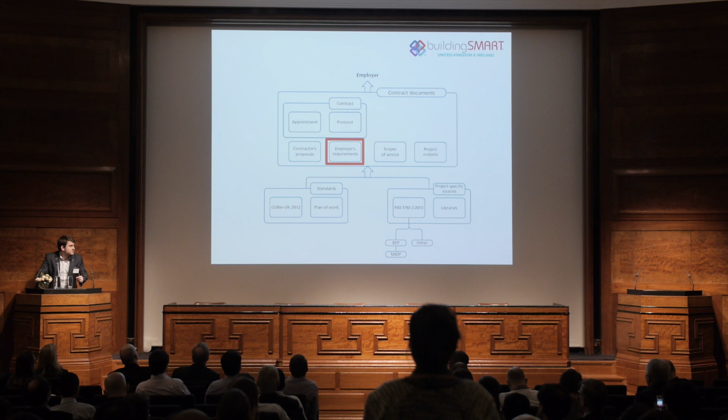For context, before we start, I just wanted to briefly tell you what an EIR is. The EIR, or Employers' Information Requirements, is one of the key contract documents that we specify here in the UK. You can see it there, surrounded by a nice big red box. It's one of the key things we set out quite early in a project. In fact, when we look at the information delivery lifecycle, it appears right in the very top corner, and it's one of the first key things that gets set out when working on a BIM project.

So it's very important. It's actually used to help specify the project information model. It's one of the key documents at the start of the scheme that informs what's happening throughout the whole project. Because of this, it's a very important thing to make sure we get right.

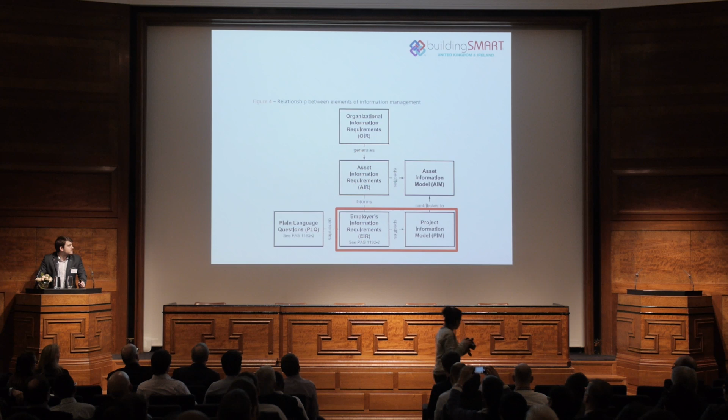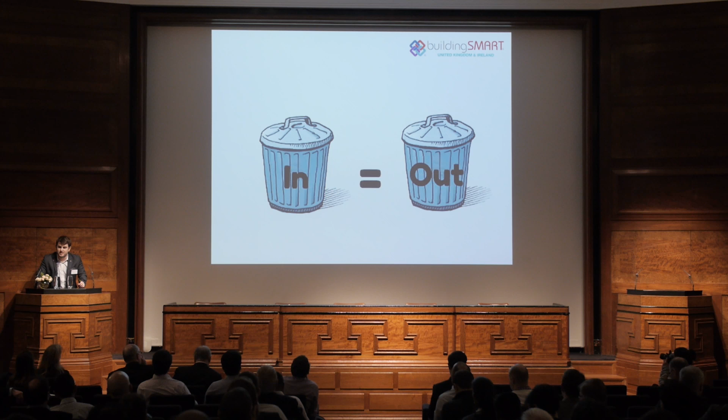Now, as we all know, if garbage goes in, garbage comes out. So it's very important to make this process data-driven and to make sure we have good information at the start, so we end up with good information at the end.

To do that, our goal was threefold really. It was to make sure that the EIR template supported the delivery of asset data, making sure we controlled what asset data we wanted so that in terms of operation it was useful and fit for purpose. The fact that we wanted to support the supply chain's response, so it was giving them information they could respond to in their BIM execution plans, and ultimately to make sure it is user-friendly.

One of the things I think we do in the UK is we're not very good with our terminology. Over here we call it an Employer's Information Requirement. In New Zealand it's called a BIM Brief, which I think is a much more user-friendly, engaging way of describing this kind of document.

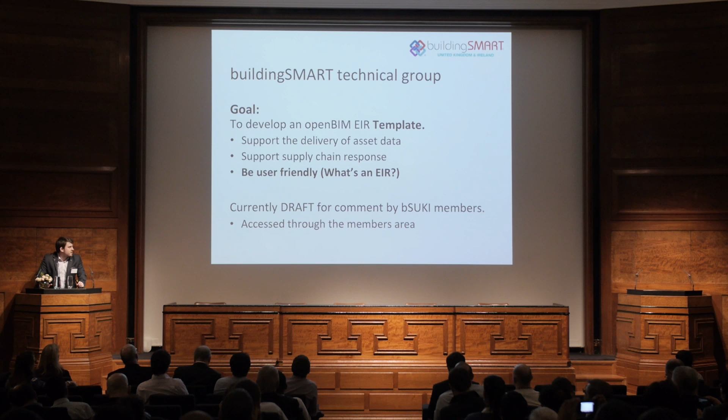Just note that the actual EIR is currently draft at the moment, and if you want to have a say in it, you can go onto the BuildingSMART UK members website, download it there, and feed back. Please provide feedback. The idea is we want to make this as industry appropriate as possible, so we'll take any and all comments, as candid as you like, and we'll look at them, consider them, and try to incorporate them in.

It's currently an evolving process, and we want something at the end that's fit for purpose. So if you're not a member, please join and you can have your say.

So one of the things I think this does really well, our Employer's Information Requirements, is it's pitched to the right audience. When you look at some of these documents, sometimes you have to sit there and ask who they're actually for.

Now, as this is an Employer's Information Requirement, it makes sense that it should be for the employer. We spoke yesterday, Anne mentioned it briefly, this idea about jargon and building smart speak. And when you talk about a lot of this, it's quite confusing.

For a quick show of hands here, is anyone on the design side and deals with employers? Yeah, I'm architecturally based, so I counted about half of you as opposed to a number. Put your hand up if you've ever had a really good, clear brief from a client. One. Great.

And that's not the problem of the client. I think that's a problem from us as an industry. We're not very good at giving them direction on the information we want to get from them. And there's a danger that if we give out lots of technical information, the client will resort to having us fill it in, which means that when something goes wrong, they don't really understand what's in the documentation, and it's been about our interpretation of it.

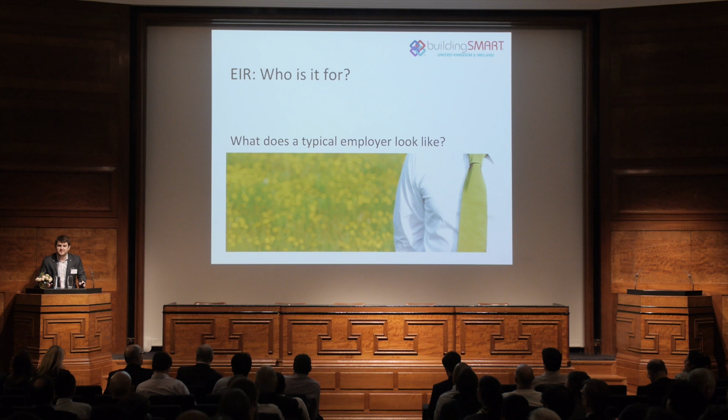And this is one of the things we tried to address. It's important to try and think what the typical employer actually looks like when we start using these things, because I think we tend to be quite introvert with our language. I tend to joke quite often that if a friend asks me what I do for a living and I try to describe BIM to them, it's actually a very difficult thing to do. I can use all this great industry terminology, but in terms of sitting in the pub and saying what it all actually is, it gets quite difficult because we're not used to using plain language.

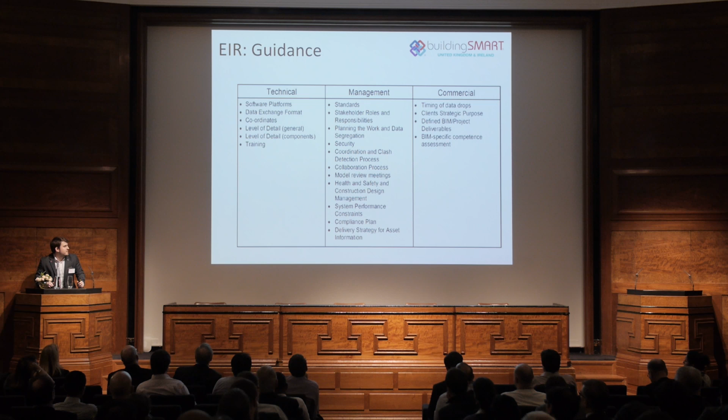So in terms of how to develop an EIR, we've got some guidance from the government, which was a very useful document when it started. It has lots of details on the kind of information you need as part of employer's information requirements. But it's very important to note that this document is actually over 2 years old. It's not current, and since then we've had a plethora of standards come out as well, so there needs to be an updating to make it more contemporary, because a lot has happened in the industry in the last 2 years which isn't currently reflected in the guidance. Hopefully our employer's information template helps to do that.

Now, I also note that it's going to be a template, not guidance. It's there for the idea that it could be used and populated, as opposed to a framework on how to create something like this. So again, the idea is to empower the person using it to complete it without having to seek further guidance.

The way it works is it's been split into 2 key sections. The first is about the unique aspects - things about the facility, product, site and project. These are the kind of one-time information you need to include. The second section is more about general information, where you could populate aspects from your asset information requirements or your organisational information requirements. Those of you who might be a repeat client doing lots of housing projects or school projects, your asset and organisation requirements might actually be the same for every project. This gives you the idea to lump all these in a general place and just focus on what's unique about each scheme.

And the way it works, hopefully, is relatively simple. You've got a simple title everywhere, a description of what's going on, and guidance given. So what happens at each stage, it actually sits there and tells you what should be in each stage.

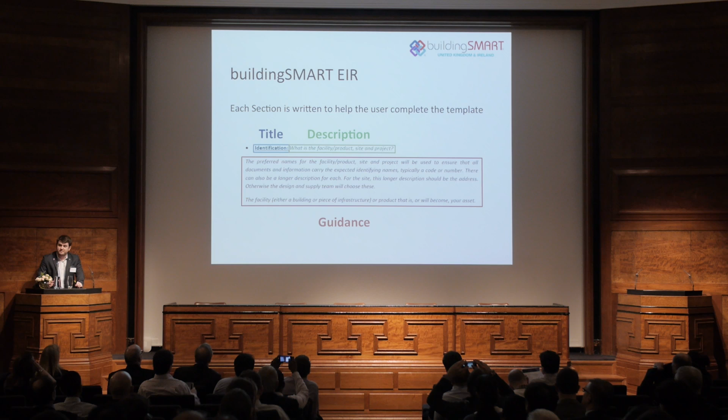So for example, this bit now, we're talking about the facility and trying to identify where it is. It talks to you about why it's important to have identifying names, what kind of information should be in there. And then it follows by actually asking you to populate the IFC attribute data. So we're actually then talking in common languages again.

Dave mentioned that I was making my PowerPoint yesterday for this. Steve Hamill dropped us in a little when he talked about the fact that the Digital Plan of Works would be able to export all this information and go into our EIR. I had a little panic, and then I quickly remembered, well, no - they're dealing with the same language. They're talking in IFC, Cobie information. That's what we're doing, which means that through a happy accident or brilliant design, we've actually got a system that ties in very well together, which I only found out about yesterday.

And that's because we're working on these common languages. Sometimes it's hard to see the practical use of this sort of open language, and I think that was a very quick, easy example of it. So we have got systems that do talk together, and it's because of these open BIM initiatives. As I said, you can export out of your Digital Plan of Works and add all the information in.

It also has suggestions on where you can find the information, which I think is a very useful aspect to it as well. So for example, here we've got the roles, and it tells you straight away that if you want, you can use the roles from the PAS, look those up and find those, and it gives you suggestions for finding other information as well.

Because heaven forbid someone suggests something different, or even you think up your own standards. Whereas, you know, a serious client or something, or you have particular ways of doing things, like the NHS or something, you may want to go off-piste for some of the things you're doing. Of course, we do suggest that where possible you should choose the standards that have been created in preference, but there's flexibility built into it if you want to.

Yes, just one question, if I may, please, Dan. I don't know if you can answer this one, but... okay. Does that... oh, fantastic.

That would have solved the problem. The fact that it's a user trial, we are testing this out with BuildingSMART members. I don't know if you can mention those taking part, or if you know that at present. I don't know that at present, but I've been vigorously suggesting people use it, and I suggest all members today do the same, because ultimately we want it suitable for industry. If you don't test it, try it, and give feedback, then it's a small group of us who have dictated what it needs to be, not the whole industry telling us what it should be.

Okay, perhaps an unfair question, since you dropped this in right at the last minute. I don't know the organisations taking part, but I do know that Nick has a number of contractors and users actually testing this out in a live situation at the moment, which is what we try to do as a user group. That's great, thank you. Are there any other questions?

No? I get off scot-free? Great, good job, thank you.

Next up, are you going to do that? Oh, you're not doing it? All right. Jeff is taking this. All right, so Jeff, you're going to talk about Cobie and going into AIM. Amy. Oh, no, you're there. Oh. Okay, so Cobie going into asset management. I'll just let you be. I think this is the start. Anyway.

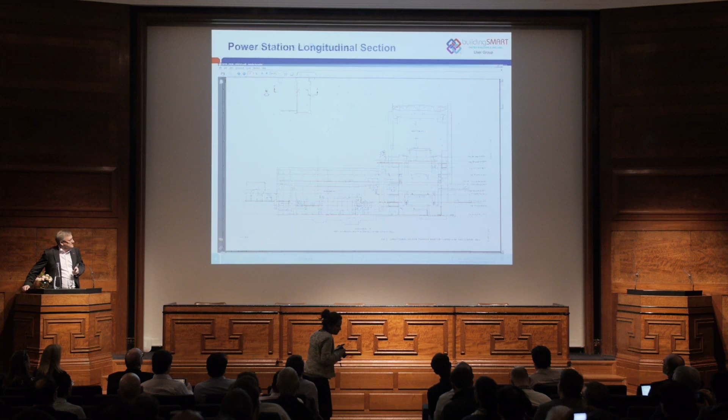There's a section, a reactor - pressure vessel - that was being inspected. You can see that was done with quill pen and parchment in the 1960s. We found those in our archive, and the client found them sometime later in theirs, so we hadn't lost the information. There were 4 pressure vessels in 2 power stations, thousands of assets to inspect, tens of thousands of photographs, gigabytes of data, lots of inspection records, and my colleague David Lennon in the Technology Centre put it all together in a Cobie spreadsheet.

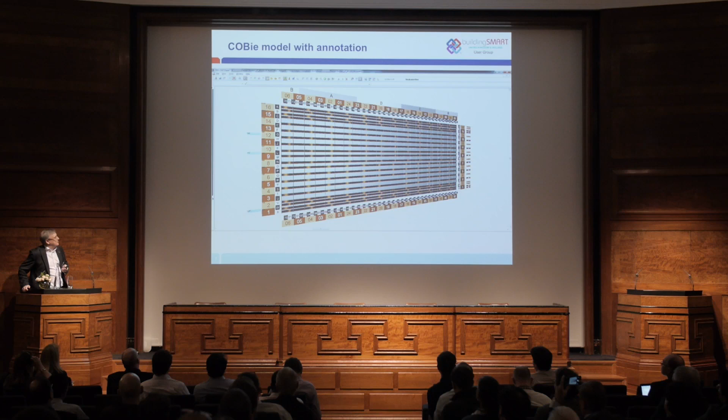So we started with nothing because we had 2D drawings. I started beavering away, creating the geometry in the Cobie spreadsheets, and then added some annotation from a Revit model so we knew where we were. And you've got to think, what does this really look like?

We've unwrapped a cylinder basically, and this is looking at one panel where you can see the brown areas are wires wrapped round the cylinder of the vessel to stop it expanding, keeping the hoop stresses in the vessel. And they were inspecting the anchor sockets. That's just what Cobie does - that's as far as you can get with creating geometry in a Cobie spreadsheet: bounding boxes, which wasn't really what the client wanted because he didn't recognise his infrastructure there.

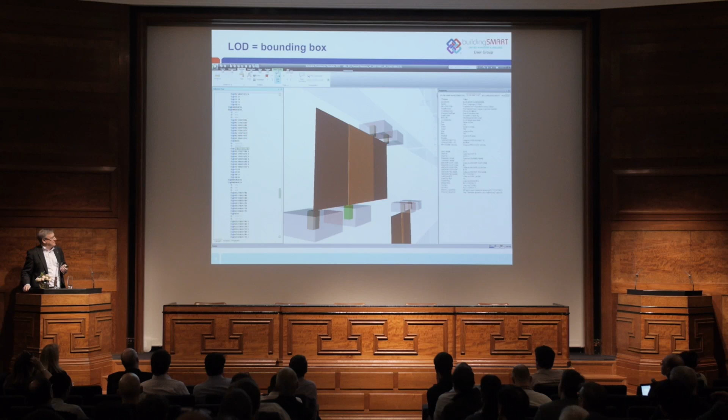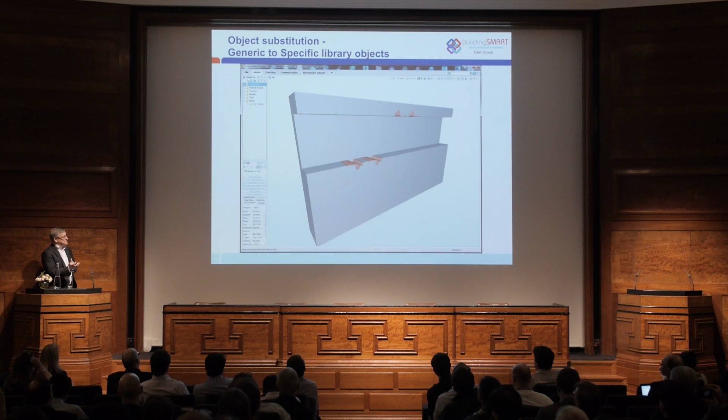So we did some model substitution. We got a Cobie spreadsheet, exported it as an IFC file using Nick Nisbet's BIM services tools, and then substituted more specific geometry for the simple rectangular boxes. So Cobie was almost the beginnings of things - we'd already moved into IFC because it's far more rich in what we can do with it. We used XSLT engines that Nick had to substitute the geometry.

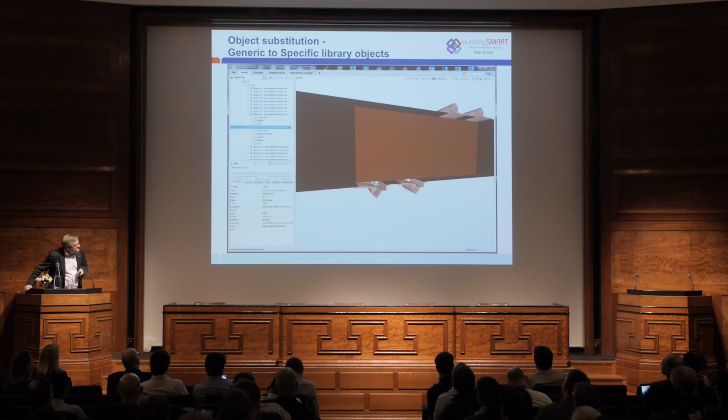So there's the concrete panel with the anchor sockets, and here's the anchor sockets with the liner for the wires, and we can actually see the green anchor pegs in the socket. So that geometry looks far more familiar to the client, and that's viewing the resulting data in an IFC viewer.

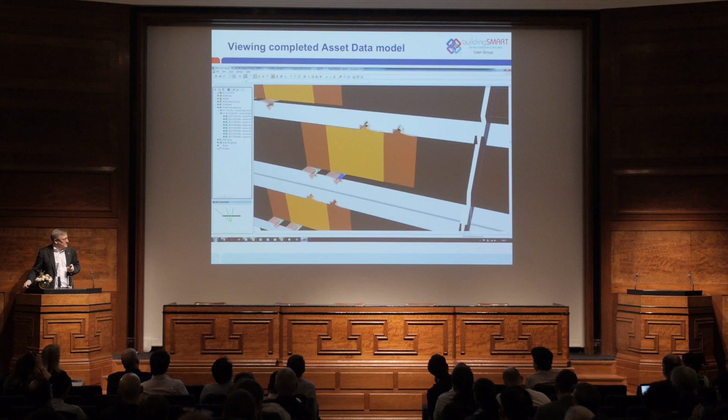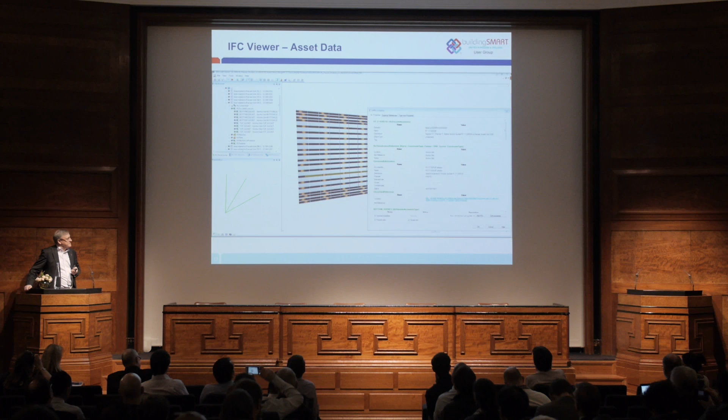So we've added into the attributes table document references for all the photos, all the information we captured. If you click on those objects, you can find the metadata, the COBie data, the properties about the objects. If you follow the link, you could get to a picture - I'll show you that a bit later. We took this a bit further. Next.

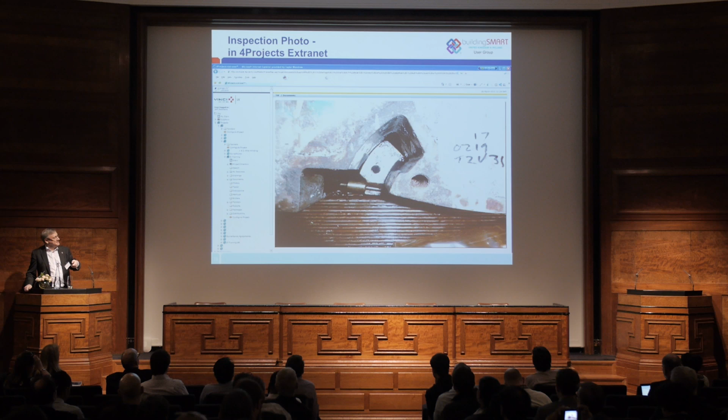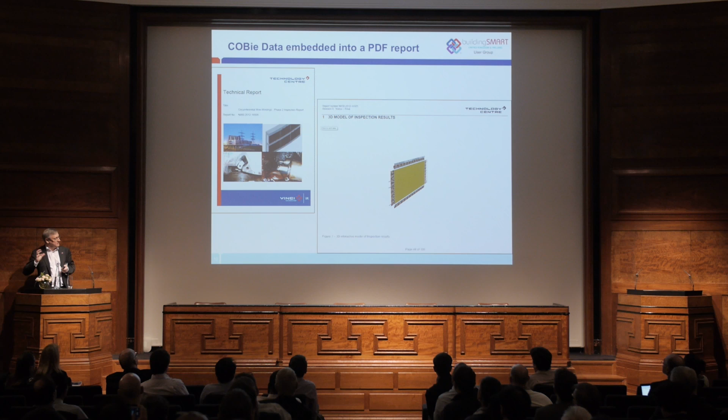We put the IFC file into a PDF as a 3D model. It's a shame the client couldn't open this because their version of PDF was rather old, but we did it anyway.

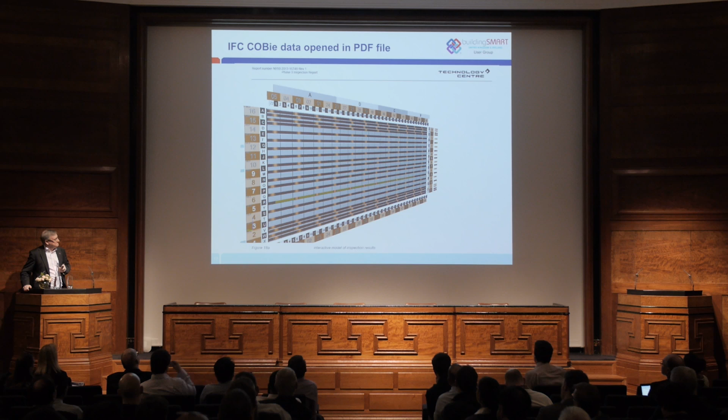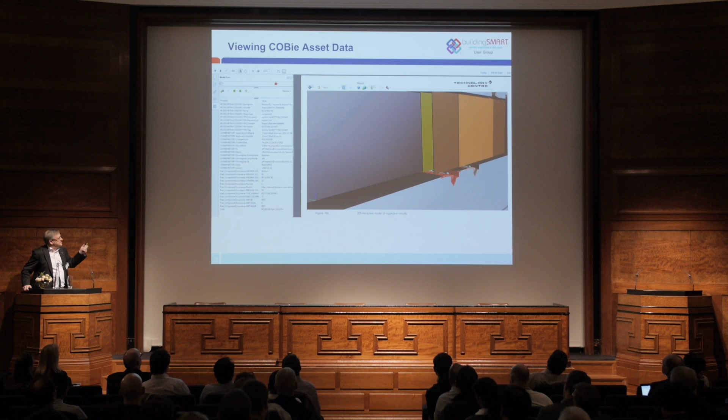I've double-clicked that image in the PDF file, and that's the same IFC data in Acrobat Reader. We've highlighted a socket, and you can see the metadata associated with it. If you followed the link, you would get to the extranet where the photographs have been uploaded.

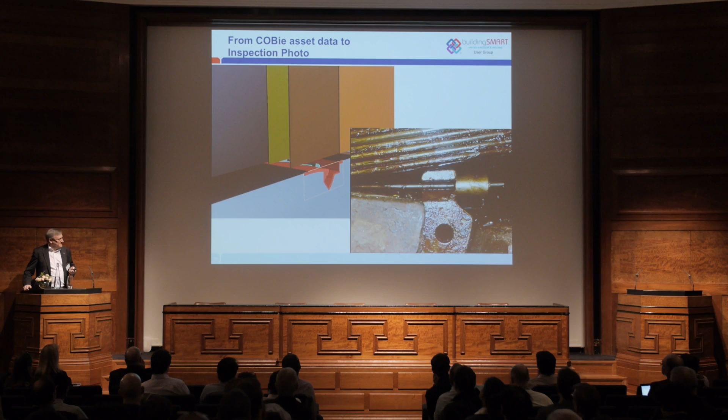You can see there's a picture of that particular anchor peg in that socket. So we've tied COBie IFC to the real world, and that did work, so it's more than the spreadsheet. The spreadsheet's almost a backward step. Think IFC model - you can view the COBie data in the form of a spreadsheet, but it's probably better to keep everything in IFC models, a federated set of models.

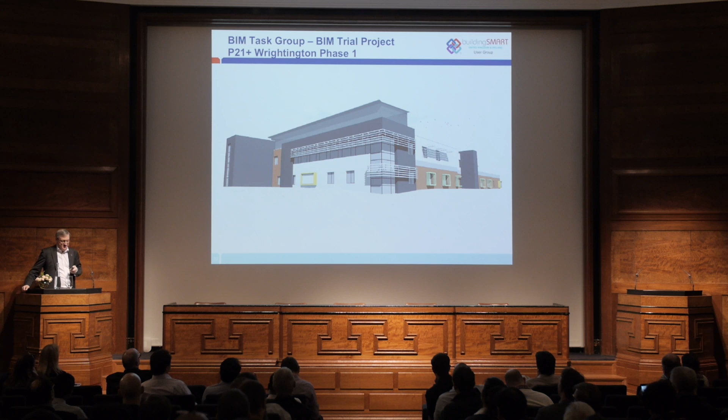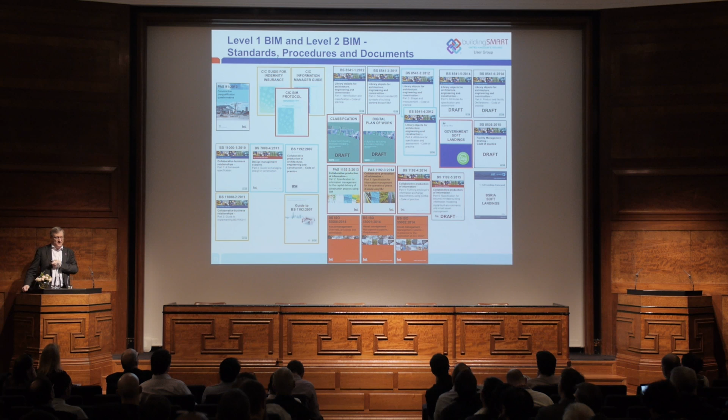Another example we've looked at is a P21 hospital, where we attempted to say what we wanted to capture, because nobody had thought about it. It was an early adopter project, and we just were volunteered to do it. Lots of guidance, which is confusing - if you print it all out, it doesn't fit in an A4 folder, so it's quite challenging.

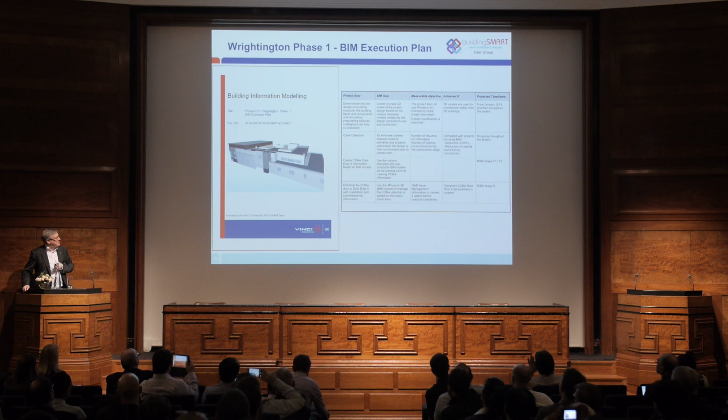We've got design management plans, procedures, BIM execution plans. We tried to ask the client what systems - so he ticked all his systems from his standard FM manual, and we found not all of them existed in the building, so we started unticking some of the boxes. Then we looked a bit more detailed, but it's still a tick-boxing exercise. It doesn't get you anywhere, really.

We tried to say what zones were important, so we identified a few. Another difficulty - how are we going to classify things? We never got to the bottom of that, because when we looked at the various building models, nothing was classified when we looked at it in IFC, never mind in COBie. But that's what we wanted.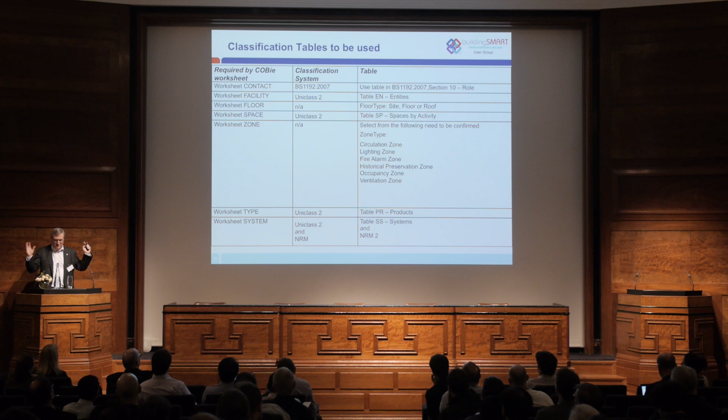I think that's based on Uniclass 2, which is now Uniclass something to be announced - was it announced yesterday? No, 2015, they said. I think this is from a slide that Brigitte presented some time ago.

If you look at it from a Cobie point of view, it's overwhelming - there's a heck of a lot of cells you could fill out. Perhaps Brigitte's view was minimum Cobie. It's been made worse by BS 1192 Part 4 because they've added more attributes to some of the tables, so it's got a little more detail.

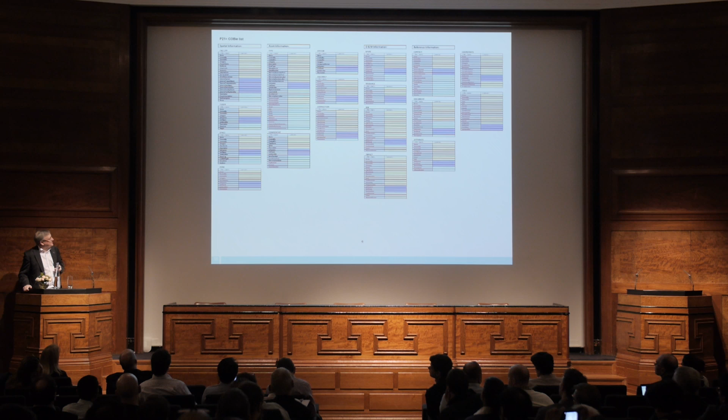MoJ have got a view of what information one of their asset management systems could import, but most of it isn't used. And P21 have come up with a similar, very minimalistic set, which is still quite challenging to deliver. But what did we get?

In our extranet, we'd implemented BIM Level 1, so we had a common data environment. I could find the 3 discipline models without really knowing whether they were there - they were Revit files. I also found the IFC files that went with the Revit models and some of the subcontractors' models, which was a good start.

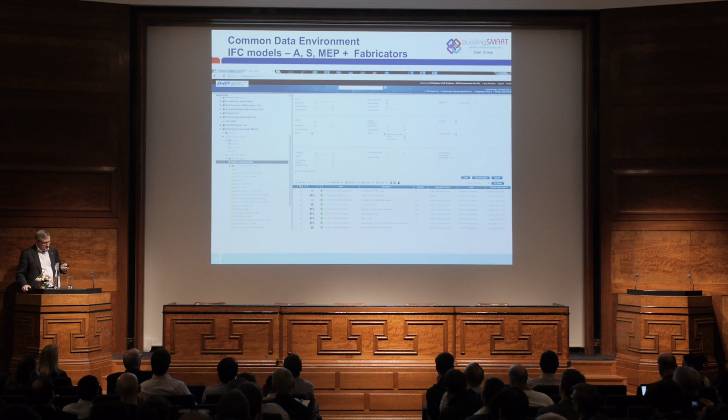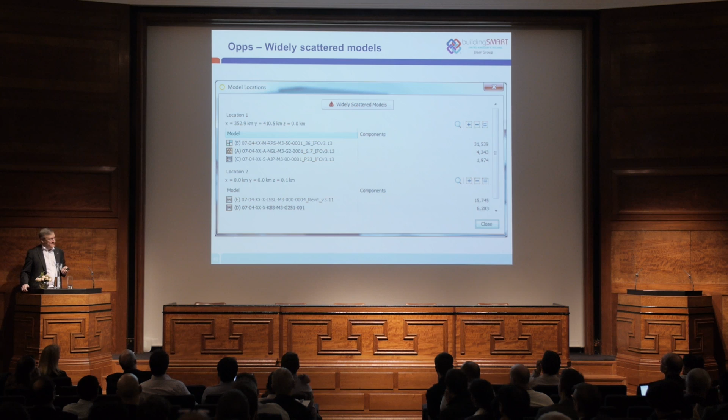But Cobie then said your models are scattered - some are at Land's End and some are on the site. An issue for BuildingSMART and the IFC certification, I think. It's not really, it's a simple issue.

Jeff just edited the IFC files and then discovered the edits were different for each of the 3 disciplines, which was very worrying. They'd all decided on their own where their local origin was, but Revit, bless Revit, had managed to handle that internally. Once you come out into an IFC world, you see reality - things weren't exactly in the same place.

Further inspection - despite saying at the top how we wanted things named level-wise, all the disciplines decided to invent their own. I think the MEP contractor got it right, which is fantastic - 1 level per story, not lots, to help you create the model. So more issues to be resolved, potentially.

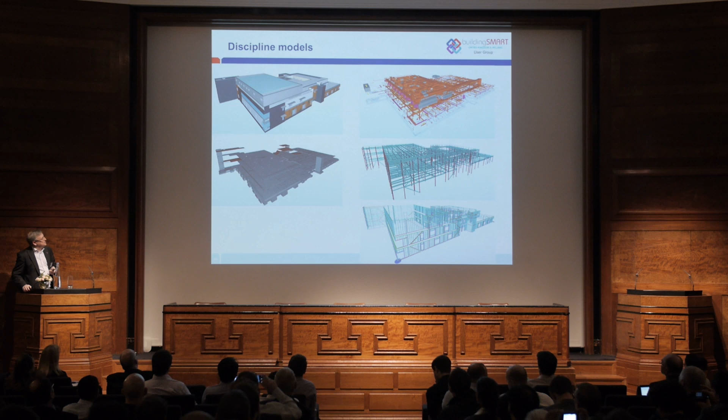We did get some federated models. There's an issue in the viewer there - there's some gaps in the walls. Worrying, but it's quite complicated.

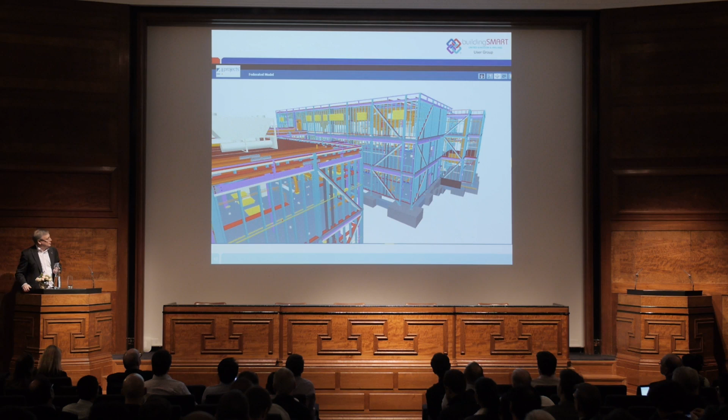There's hundreds of thousands of objects in there, and this is viewing in the 4 Projects BIM modules. So this is BIM in a browser on your desktop - you can see the whole model. So it is quite complicated.

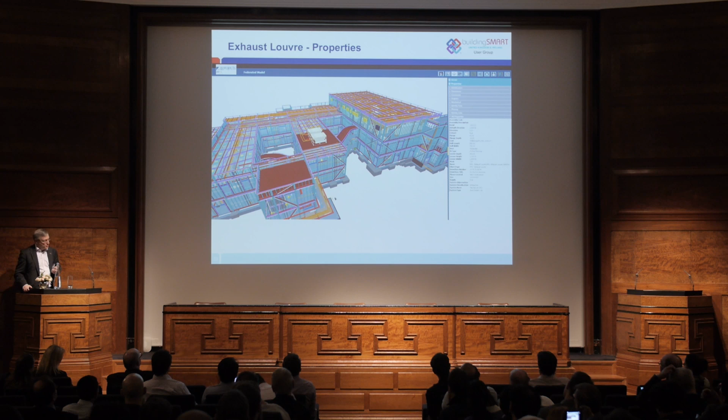And if you click on that exhaust louvre, you can see there's lots of lovely properties, but it's probably the properties that the designer decided he'd put in there, not the ones we perhaps wanted in the ER if we bothered to define them.

But there's no standard. So we need a data dictionary, as we've all been saying, so there's a consistent single source of the truth. So looking more at, can we create Cobie from these federated IFC files? The answer was yes.

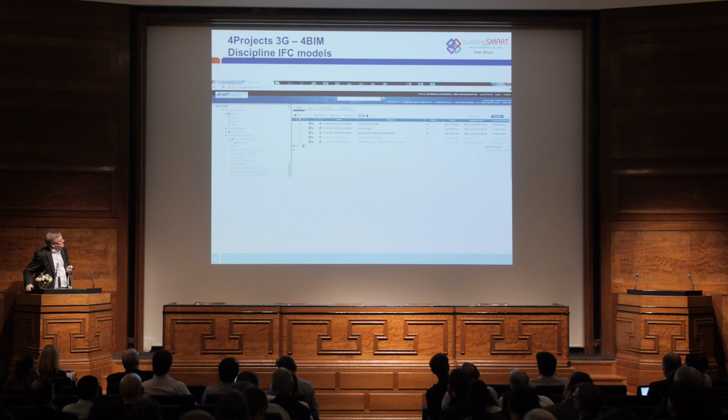This is again in 4P looking at that data. We've found 5 IFC models. We've federated them together, so we've got a snapshot of them. And we can say, well, I can view one or many of them and create COBie spreadsheets from one or more of them.

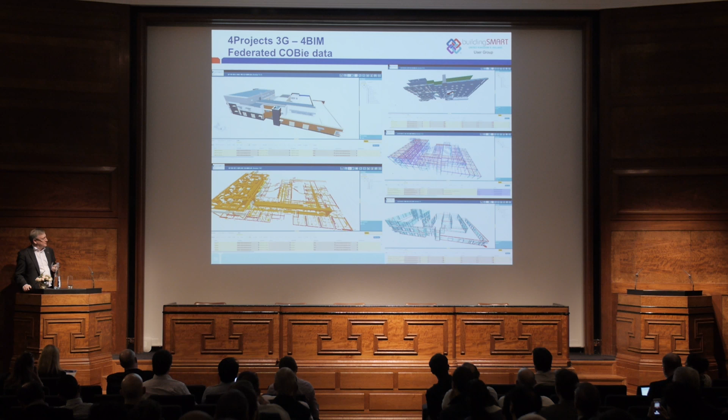So that's looking at COBie data in a browser from 4Projects for each of the disciplines. The most important ones are architectural and MEP. There's probably hardly any structural information from a COBie asset point of view, but the information's listed. And the federation program could be more work to be done, but we're beginning to say, well, what bits do I want aggregated together? And in the background, it creates COBie spreadsheets.

But there's lots of errors. If you look there, that one says 2,232 errors, lots of warnings. I think this is the architectural spaces.

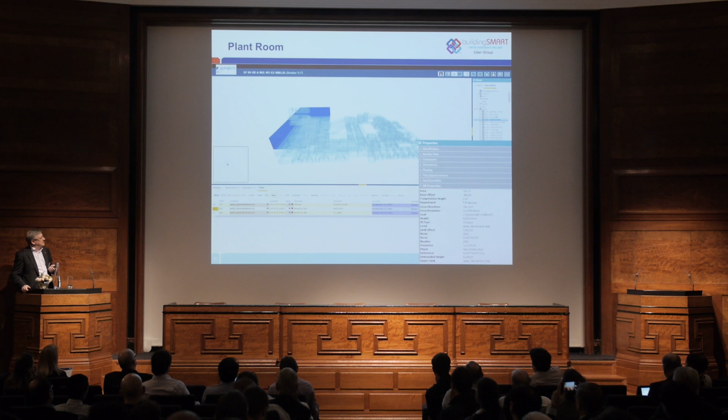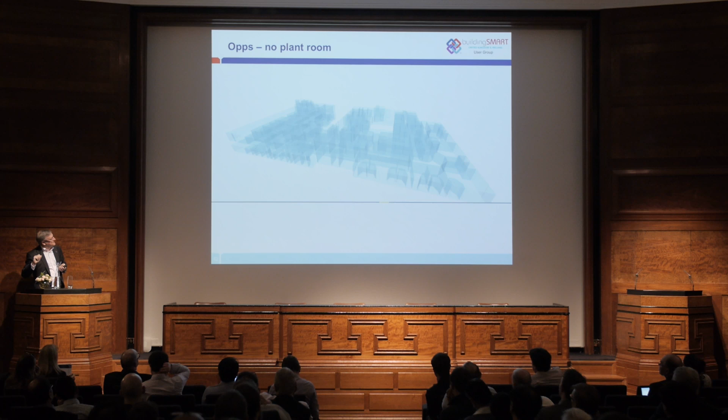You can see the plant rooms modelled there in the architectural model, but oops, where's the plant room in the MEP model? The fact that I referenced the IFC file into the MEP model, it's still not there in the COBie data for that, so most of the important plant is not going to be referenced to any spaces.

So we've clearly got issues to solve. We need more consistent use of a common data environment. That's basic. In many of our projects, we find it's used as a dumping ground, and you have to know really where it was put to find it.

And we need better 3D models. We need things to be classified. We need improved IFC export, which does put classification in the right place in an IFC file rather than perhaps leaving it behind or hiding it somewhere.

IFC to COBie mapping can be improved, so I'm in control and not the hard coding that's provided by, at the moment, by some of the tools.

So, which FM systems can import COBie spreadsheet? Many of them say they can, but I've struggled to do it with the experts from our FM provider. It's no good. If I can't do it, nobody's going to better do it.

But it is possible. We did it 10 years ago in COBie IFC, or IFC trials in EU and UK funded projects. So it can be done, it just needs a little more effort on our parts.

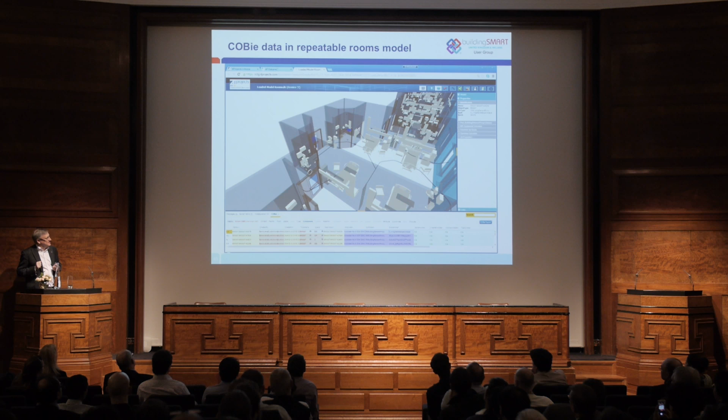So let's now look at a project where we've simplified it. Now, we thought repeatable rooms, it's only going to have a certain number of assets in the file. So P21 looked at repeatable hospital rooms, but sadly, when I looked at the 3D model, all the rooms are in one model. So it looked nice, and you could cut it up and create the drawings to show the repeatable rooms. But that's where we stopped on that particular set of information.

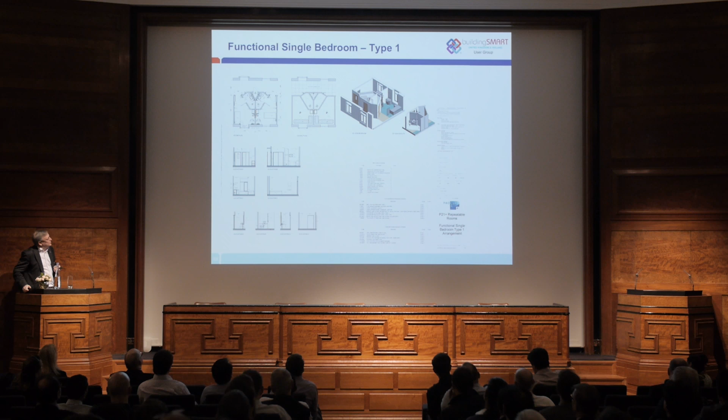You could create lovely reports. The next group of rooms that the P21 people have done is for mental health, and these are just, I think, were published this week. And this is, I think there's 3 basic room types, and they've got 2 or 3 or 4 variations.

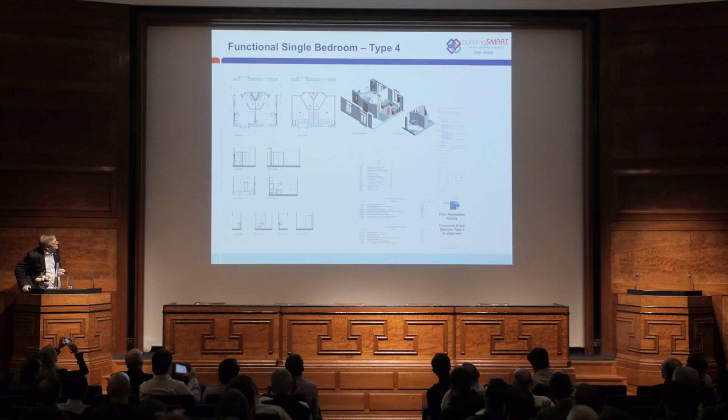And this is a type, this is a single bedroom, type 1, type 2. You can see the furniture jiggling around a bit. So there's 4 variants. And I've started to look at the models.

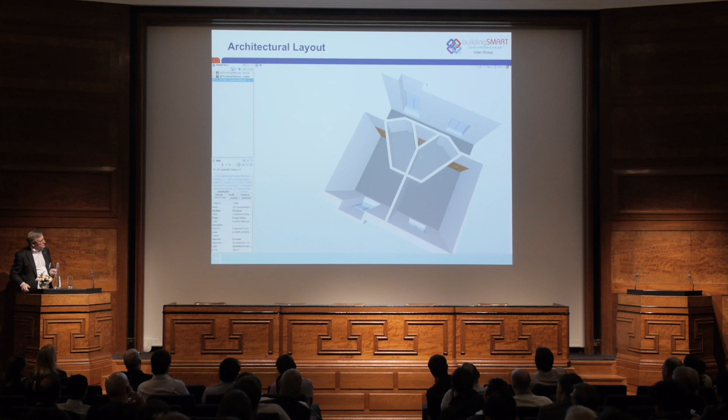We try to say we want the repeatable rooms modelled in a way that the fabric, where the rooms sit in notional spaces, is modelled. So we've got the external walls and some internal walls. Perhaps some of the internal walls should be part of a repeatable room in an architectural fabric model, which would be substituted by the actual building.

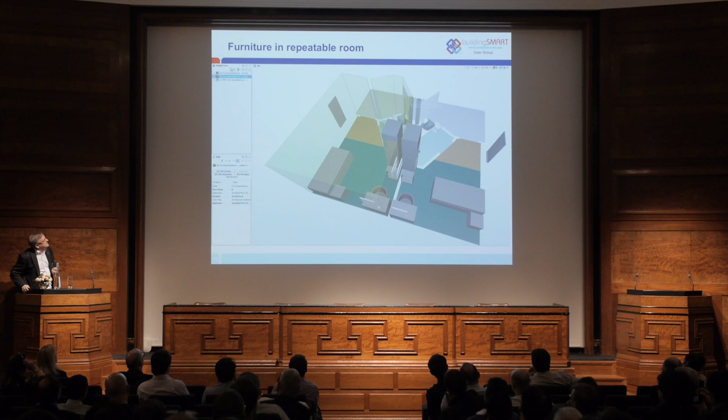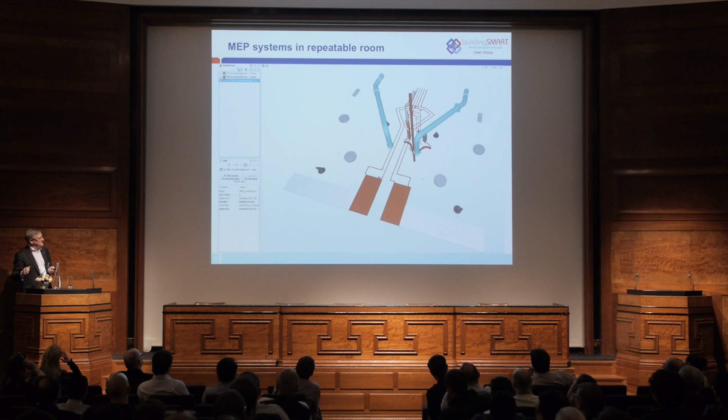And this is the furniture, the architectural furniture in the room and the MEP in the room. So we've separated them out, which was a start from the previous one. We've now got models for each room where we've separated disciplines. And we can view that data in various IFC viewers and look at get access to the properties.

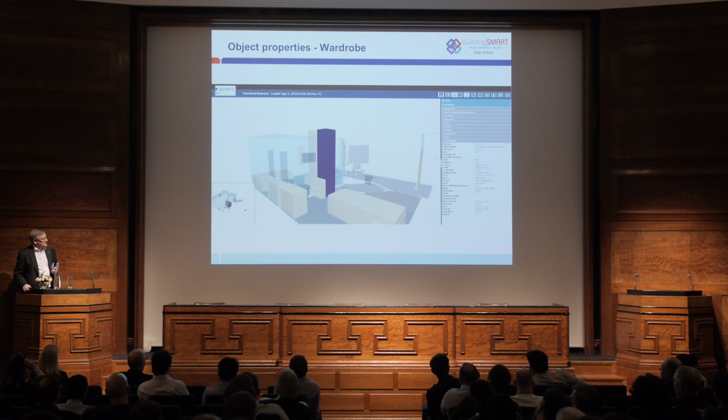They're all a bit ad hoc because depending on what building library, BIM library, object library you used, or whether it was a Revit family created, they're ad hoc. Building data dictionary, you need to get some consistency rather than a random list of attributes in a Cobie attribute table. So there's a wash-hand basin with property, valve with some property.

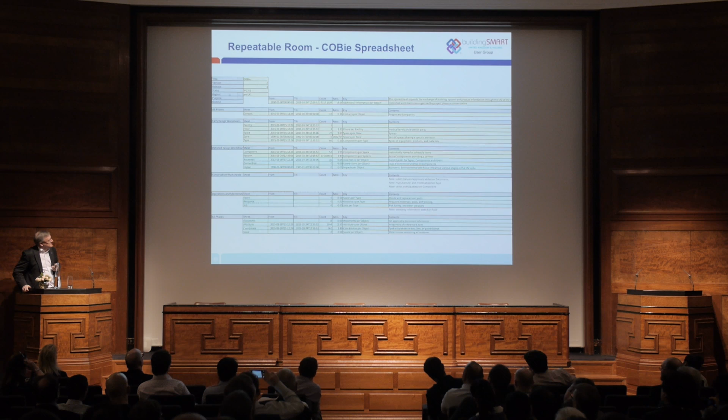So there's lots of rich data. And there seems to be quite a lot for that space exported into a Cobie spreadsheet. But the facility is not properly defined.

You'd have thought that would be easy, but it's probably the worst thing. BIM doesn't like exporting the facility - multiple floor names, as we saw in my hospital example, rather than one story in the model. Spaces are not classified, and components are not always associated to a space.

Type names are not unique enough for Cobie, for the Cobie BS spec. I need control on how do I create names that are unique, not just the part name in the family - it's not good enough because it's all called standard, small, large. Hardly any types have classification. That's just better modelling, better exporting of IFC to a classification object.

Type properties are not consistently defined - again, data dictionary. Components are not always referenced to a valid type name. That's just sloppy export mapping. The objects are there, but we don't seem to have got the relationships between types and components.

At a system level, not all systems are classified, and that can be quite challenging for BIM systems. Some systems don't even have a system name defined, so they exist, but they're not really called anything. And the names in the systems, it would seem, don't exist in the component sheet, so that's worrying. I won't go on to the attributes because that would bore you to death.

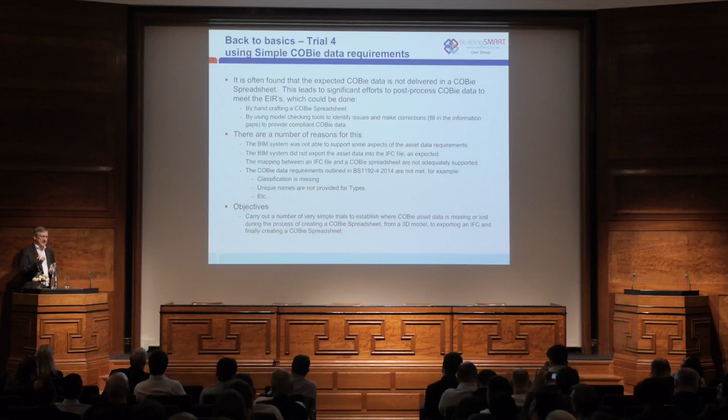So we need to go back to basics. I think David mentioned there's 3 trials - well, I've invented a 4th trial, which is using simple COBie data requirements. I think we've got to go back and say, just handle classification. Can we use a classification system that the UK uses? Can we import it into all our BIM systems without it saying syntax error? Or you can't do it because it's hard-coded to a classification system that's come from another part of the world.

Will the classification get exported into the right place into an IFC file? There may be more than one classification system defined, so let's have them all - not at a component, perhaps at the family level, but perhaps at the instance level, the actual way it's being categorised internally by the BIM system as well. That would be very useful to get a handle on when we're post-processing data as to what the objects actually are. So it goes on.

So the objective is to carry out a number of simple trials to establish where asset data is missing or lost during the process, and then we'll have discussions with the various parties in the process to try and improve the situation.

And the more detailed one is basically looking at, if we've got this COBie data, can we get it into FM systems? Can Cobie Spreadsheet data or an IFC model be imported into the asset management system? The user group has said, well, it's probably quite easy to read, ignore most of the errors, but it would be a good trial to see, well, can you do a round trip? Can you export Cobie Spreadsheet IFC data from your asset management system, having added a management regime or spares details? Because then we'll see, have you really understood the data you've imported?

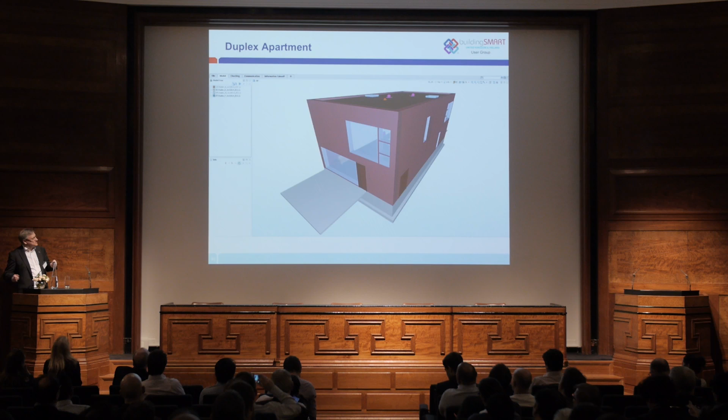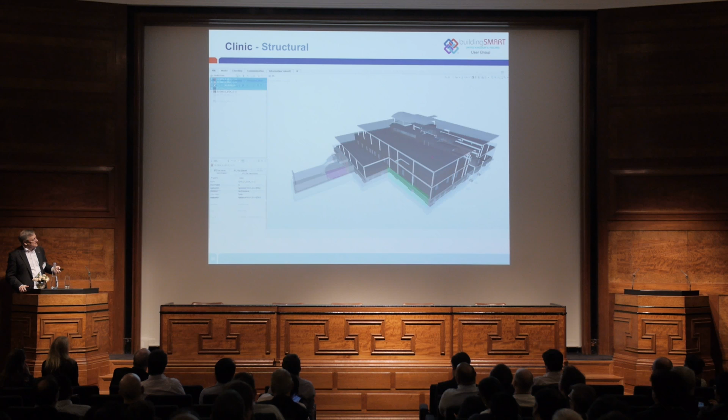And the models, which are open source, duplex from BuildingSMART in the US and the Common BIM Files - there's the clinic model. Everybody can get their hands on these, and then use your own as you like, we have. We've found the P21 hospital and the repeatable rooms as test examples.

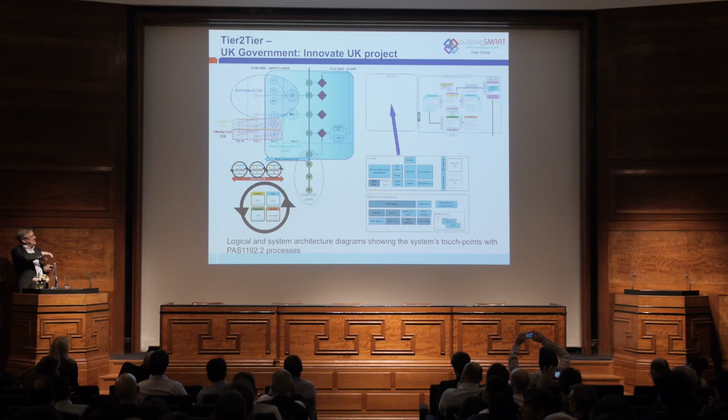And just one more thing - I think having created all this COBie data, 50% of it is probably not in the design detailing stage, it's captured in construction and handover. So we need to find tools that will use mobile devices, simple forms, that will allow our supply chain from their own sort of private, lightweight, common data environments to capture this type information, material information, object information, commissioning information, and add it to the IFC model, the federated model which contains all the asset data.

Having got that, we'll have a full data set, and we can then challenge the FM providers to import the data. So at that point, I'll finish.

All right, any questions? Hold on a second. You're doing good, I can do it. I'm going to go back there because they haven't had a chance yet. All right, who's back here? There was one. Oh, Paul.

Have you considered running any trials for infrastructure projects to see how COBie can cope with those as well?

Yeah, you're quite right, we've got to find some examples in infrastructure. I think that's a little more challenging because IFC for infrastructure perhaps doesn't exist, but a lot of those objects could be exported as they are anyway, as we know. So yeah, I think we're focused on buildings because those are most advanced, but some of the Crossrail stations have equally the same issues. We want the client to have asset data handed over, so there's perfect candidates on those projects as well.